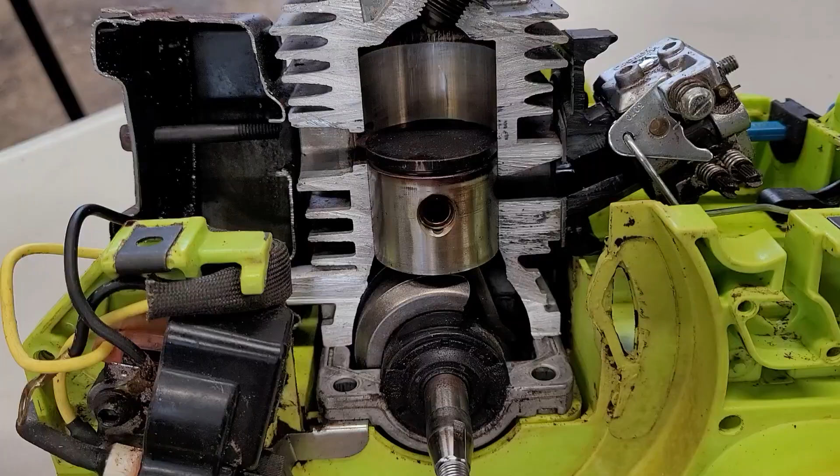Now, let me get that camera and I'll show you close up. Okay, so here we are right up close. So you're familiar with this enough. You know what's going on, right? When the piston goes up, let me get back here. As the piston goes up, what you are doing is you are decreasing the pressure that is in the crankcase. And the pressure drop here relates to whenever this opens up, airflow goes through your carburetor and into the crankcase.

Then we are simultaneously compressing what's up here. It explodes when you hit top dead center. Boom. And it drives the piston back down. The driving of the piston back down is taking this, now full of fresh air and fuel mixture. It's forcing it up that little channel.

You can't quite see it in this, but it is a transfer port. It's pushing it up that little tunnel. You're about to see it. And it comes out right there. It floods back in like this. Now, but before that happens, let's go back, rewind. You've got all these exploded gases. And as soon as you get right there, the exhaust is open and it starts to flow out the exhaust.

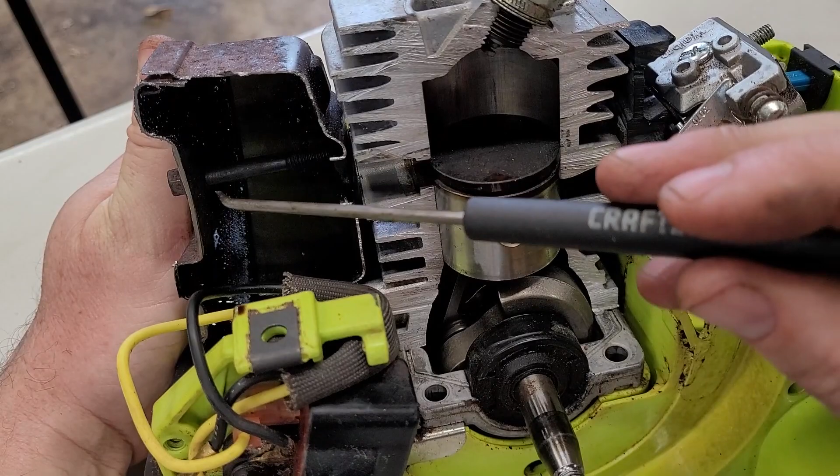Now, this is what I am concerned with. These mufflers have been on like every chainsaw since the beginning, basically. All they are is a box. Every single one of them is almost identical in size and shape and function. There's different ones. Some of them are more clogged up than others. Some of them flow more freely, blah, blah, blah. But there's been little thought given to the mufflers at all because, well, who knows why.

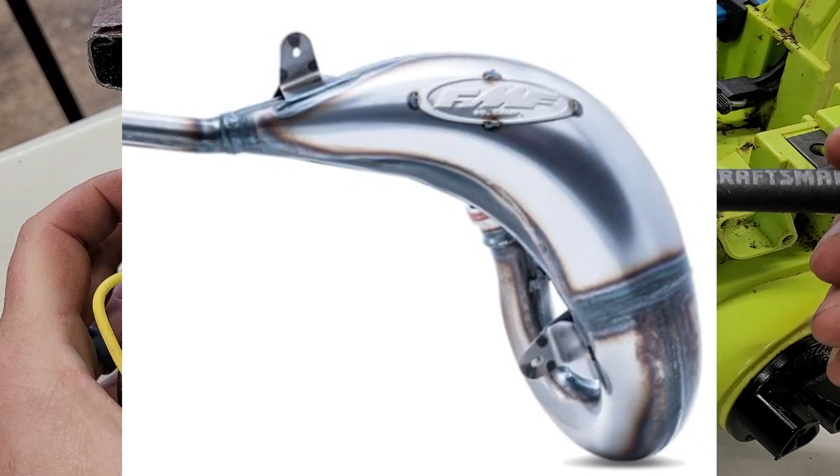I can tell you most people, whenever they think of a tuned exhaust for a two-stroke, they're thinking of the large expansion chambers like go on dirt bikes, right? Now you've seen them put on chainsaws, and that's fun. That's fine and dandy. But you're not going to have a great big pipe like that walking around in the woods and cutting down trees. And so that's why this one is by far the more successful model.

But what people don't talk about enough is that there is a way to tune this one. Will it ever be as good as an expansion chamber? No, it won't. However, you can get performance out of one of these. And the way you do that is by the distance of this wall right here in relation to the piston, the distance that the exhaust has to travel before it hits a dead stop wall.

Now, I don't think I've mentioned it yet, this video is, yeah, sure, for my audience, but it's largely for my father-in-law and my brother-in-law. My father-in-law is a world-class mathematician, and my brother-in-law is a world-class engineer. He used to work for Bombardier, but then the company got bought out by some French company. Anyways, point is he's a darn good engineer, and my father-in-law is a darn good

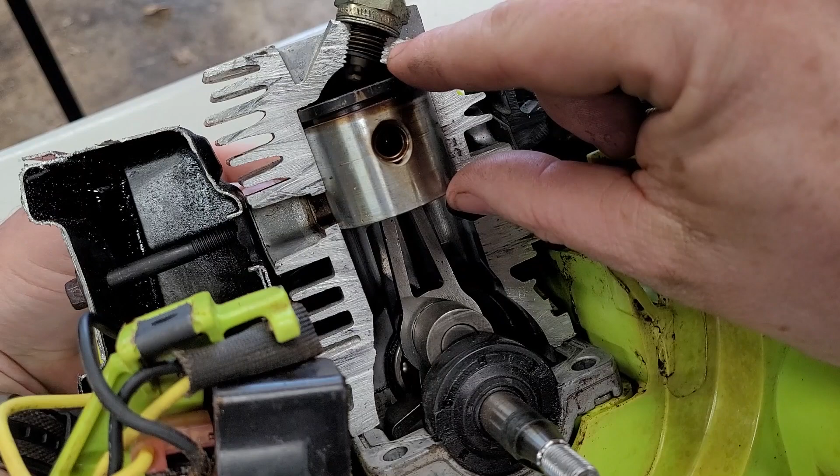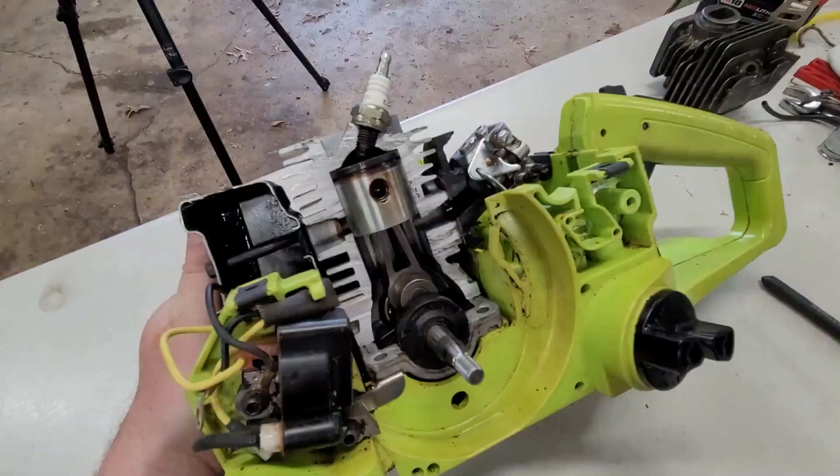The piston in the saw that we are going to be messing with has a stroke of 32 millimeters. So 32 millimeters, boop, boop, boop, and then another 32 millimeters. So it has to travel a full 64 millimeters for one rotation. And what we're going to aim for is 10,000 rotations per minute. Not this one, but the saw that I'm going to be building, I want it to reach peak power at 10,000 RPM.

Now that's going to give you a range of, say, 9,500 RPM to 10,500 RPM, something like that. It is going to give you a range. And I'm perfectly fine with that. And the way that we're going to base this calculation, we got to figure out the speed at which the piston is traveling. The full stroke, 32 millimeters down, 32 millimeters to the top.

So 64 millimeters, and we're doing that 10,000 rotations per minute. All right, 64 millimeters, 10,000 rotations per minute. And then we've got to figure out how far we need to go out before it hits this wall, bounces back, and then bounces out again.

So that means we need the measurement from this side to this side, which is going to be 44 millimeters. So if you consider this the start point, how far does it have to go before it can travel all the way back and back across this 44 millimeters and this 44 millimeters to get out the exhaust? So that's the project.

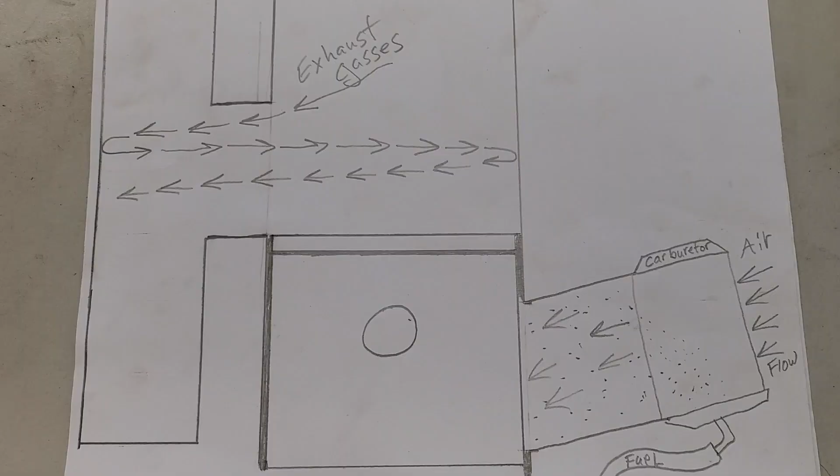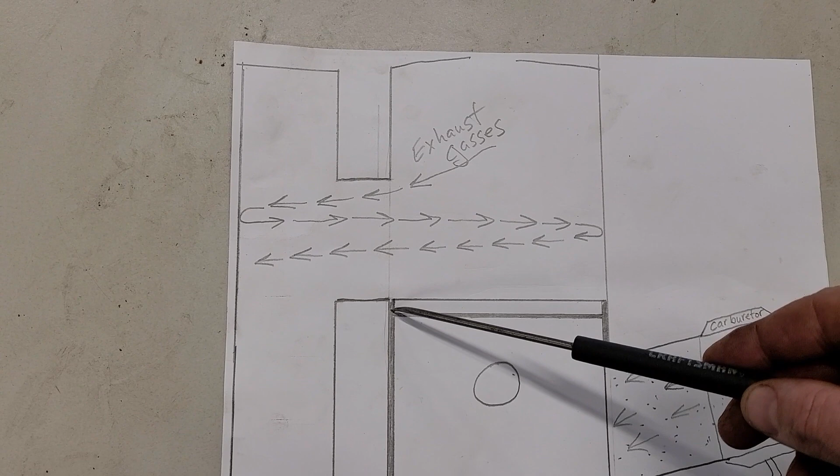So I made this real cute little drawing. All right, we've got a piston that comes down. The exhaust gases have to go in, hit the wall, bounce back, hit this wall, bounce back out to the exhaust again. So all of that travel has to happen in the distance from here and then back up to it again. So as the piston goes down, exhaust gases escape, come back, bounce back out, and then it closes up.

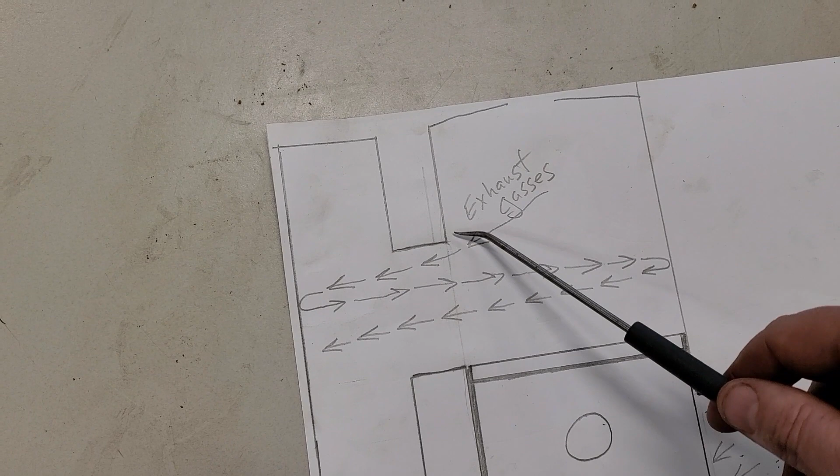So that's the time. So we've got to figure out how long, how many milliseconds or whatever, does this stay open for, if we're going down and back up 10,000 times per minute, and it's overall 64 millimeters of travel. So now we've got to figure out how big that opening is.

The cylinder at the beginning of the video. Here we go. We are going to measure the distance of this opening, the exhaust port. That is 10.49 millimeters. I will make it a little bit bigger, so we'll go with 12 millimeters, and it'll be open and closed, so I would say 24 millimeters. So that opening will be open for 24 millimeters of the piston's travel, if that makes any sense.

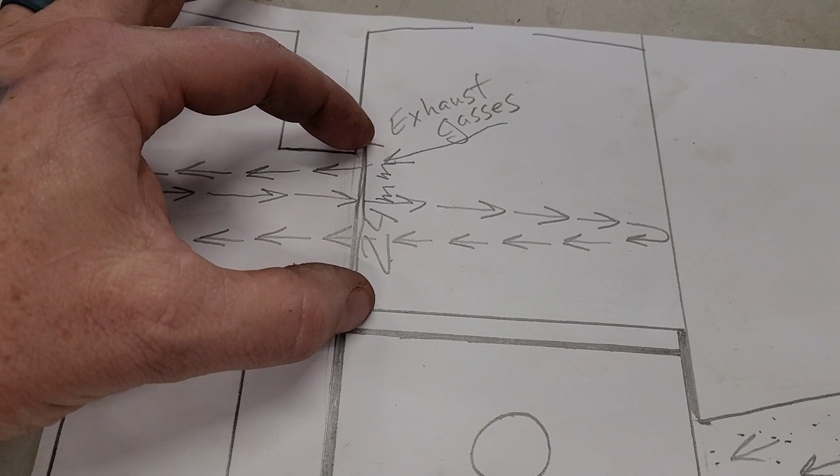Let me draw it out right here. I would imagine that it makes no difference whatsoever where these 12 millimeters times 2 makes 24 millimeters. It would make no difference if they were up here versus down here. So that shouldn't come into play whatsoever, I don't think. So all we've got to do is figure out the speed of the piston. We've got to assume that it's going to travel at the speed of sound.

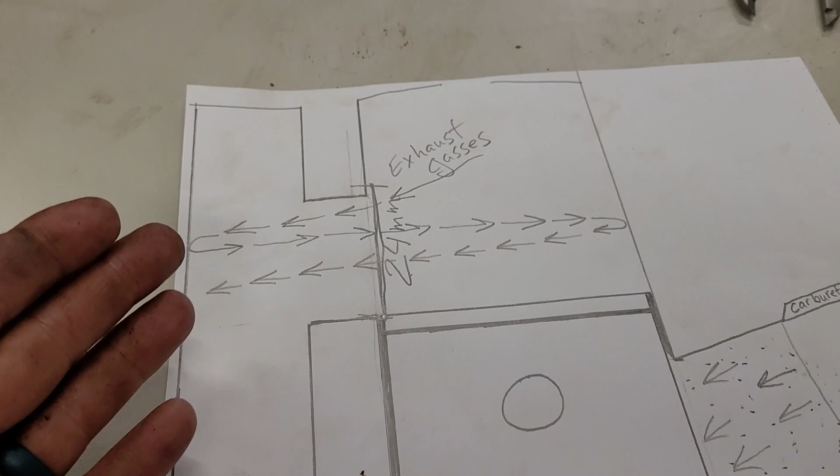All right. Now, Elmar, he's my father-in-law, and he was telling me basically all you can do is your best guess. And I get that. All we can do is best guess this stuff, because so many different variables will cause a change in this. I totally understand that. But you've got to start somewhere, right? So if the calculation says that the amount of distance that we need is all the way out here, well, then that's not going to work for me.

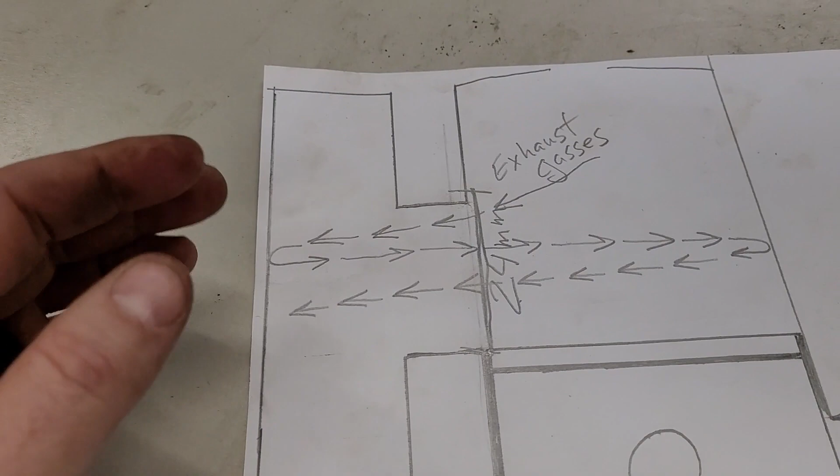So, yeah. Anyways, it's going to be a lot of bing, bing, bing before it gets in here, I don't know if that even makes any sense. But yeah, we've got to figure out the speed of the piston, and then the time that this will be open. And then once we figure out the time that this is open, we can figure out, based on the speed of sound, how long it will take to go back and forth like this and figure out where we need this wall to be.

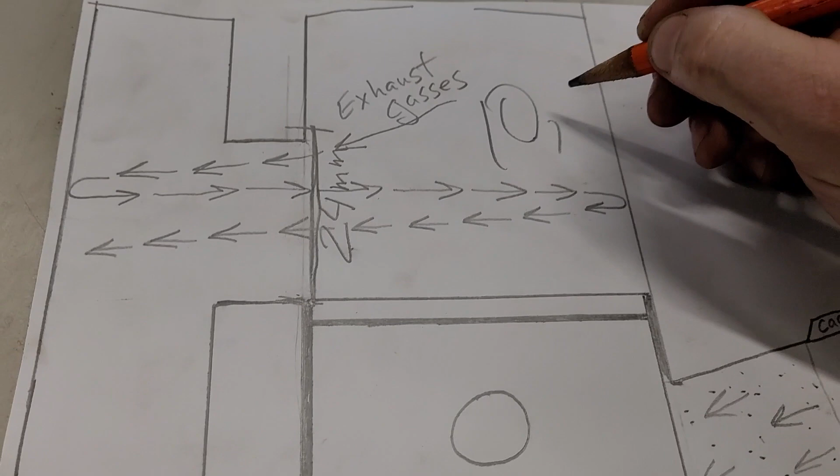And our aim, once again, is going to be 10,000 RPMs. At 10,000 RPMs, that's where we want to make peak power, I think. And that's it for this episode. There's no end result because I don't have the calculations yet. I can't build the exhaust pipe the exact size that I need to based off of those calculations. So anyways, I will do calculations on my end and try and figure this out myself. It's really just basic math.

First, we've got to figure out how fast that piston is traveling. And then we've got to look at the opening of the exhaust port, and figure out from that how long it's going to stay open based on how fast the piston is moving. At 10,000 RPMs, that's the speed we're going to have in mind. And based on that, we've got to see how far a pulse will travel in that amount of time.

If the pulse will travel, say, 24 inches, since we have to go from here to here and then back out, roughly, then we're looking at needing 8 inches, because it'll go 8 inches, 8 inches, 8 inches. Now I know in that little scenario I'm not taking into consideration the surface of the piston. I'll get that. But how fast it's traveling will lead us to how long the exhaust port will stay open.